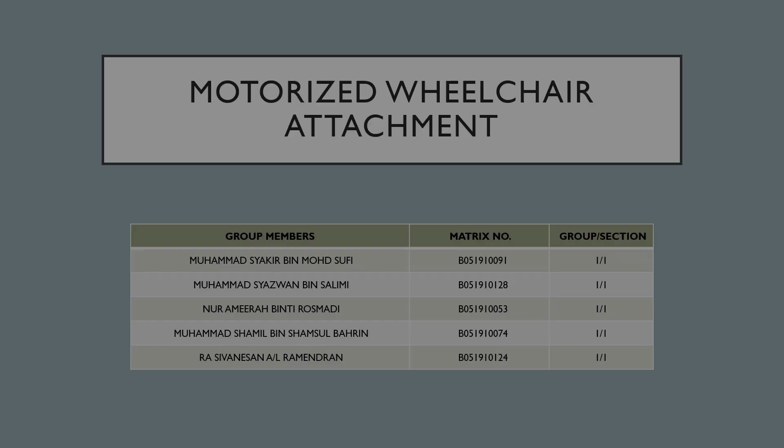Electric wheelchairs are extremely expensive to even be a viable option to most patients among the B40 and M40 community suffering a disability that renders them immobile. Some of them only have one arm after a traumatic accident and could not operate a wheelchair by themselves. As they cannot afford the necessary expense of an electric wheelchair, they just live with the disability and lose their independence. But for the ones that need an electric wheelchair, they will have to sell their current wheelchair to afford the motorized version. Our team saw an opportunity to help society by developing an attachment for a conventional hospital wheelchair that allows it to be motorized and controlled by a joystick, with disassembly in mind for ease of travel.

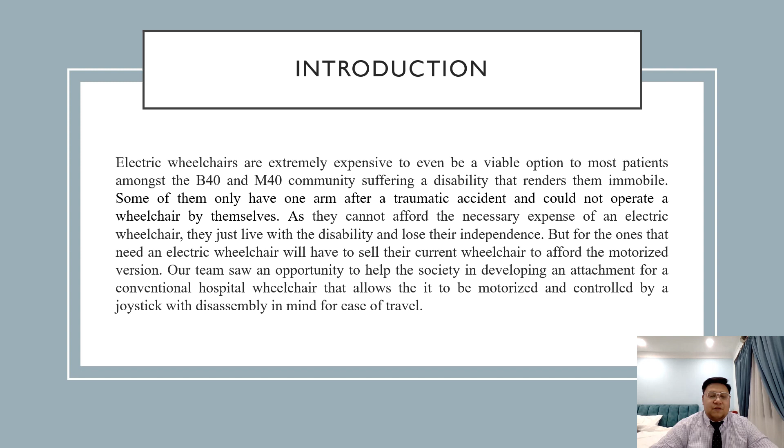The objective of our project is as follows: we will design an economic electric wheelchair package for the B40 and M40 community, as well as integrate safety elements for the safety of the user and its surroundings. It will be physically controllable by a joystick controller, and we will design it with ergonomic considerations. The design of the motorized wheelchair attachment will be tested and validated.

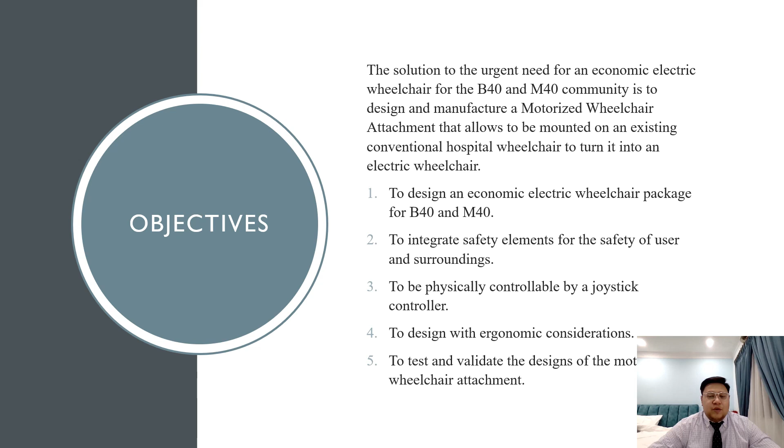Hi, I'm Sivanesan and I'll be doing the literature review. Omega Medic Supply is a company which produces electric wheelchairs. Their latest product is called the Omega Steel Electric Wheelchair, made out of steel. The limitation of this wheelchair is that it is not very portable because it is heavy and bulky, and the parts are not easily detachable.

Another company called Fresco also manufactures electric wheelchairs. Their latest product is called Fresco Electric Wheelchair Lightweight Hybrid Manual and Power in One. This wheelchair is made entirely out of magnesium alloy. The limitation of this wheelchair is that it only has a single way of operating it, meaning it can only be controlled by a joystick controller, and the parts are not easily detachable.

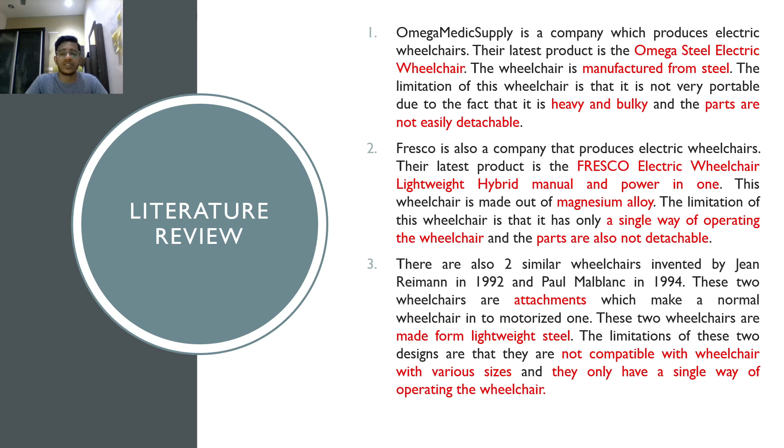There are also two similar wheelchairs invented in the US by Jean Reimann in 1992 and Paul Malblanc in 1994. These two are not actually wheelchairs, but attachments which you would attach to a normal wheelchair to convert it into an electric wheelchair. These two are made out of lightweight steel, meaning they will be lighter than an ordinary electric wheelchair. The limitations of these two designs are that they are not compatible with wheelchairs of various sizes - they can only be attached to a standard size wheelchair, and they also have only a single way of operating the wheelchair.

From this study, there are new elements and features that can be implemented into the current design so that it will stand out in the existing market. Features such as a height-adjustable controller and parts which can be attached or detached without the need of tools. Thank you.

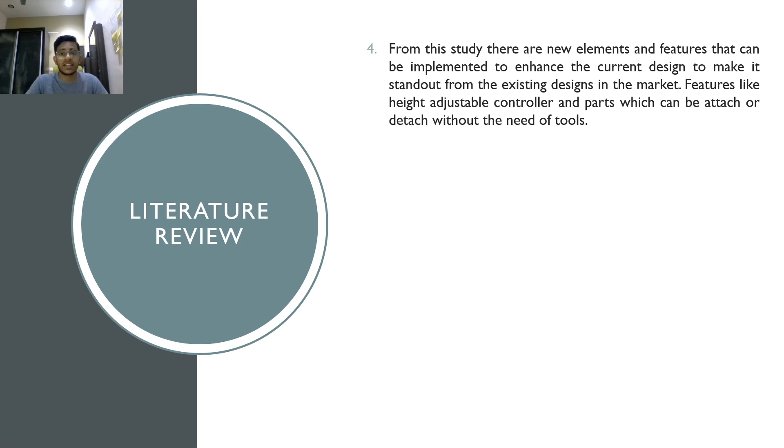I will explain the methodology used in generating the motorized wheelchair attachment. There are a total of 6 processes involved: survey, house of quality, concept generation, concept screening, sustainability assessment, and usability testing. I will explain the detail of each process further.

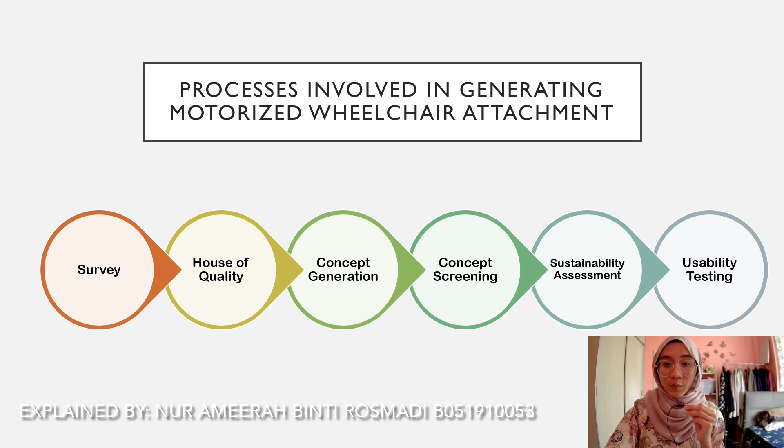In the survey, the targeted audience is people with household income below 4,000 ringgit. This consists of wheelchair users, carers, and the public. These are categorized as B40 and M40 in household income classification in Malaysia. The survey was carried out with a total of 41 respondents from both genders.

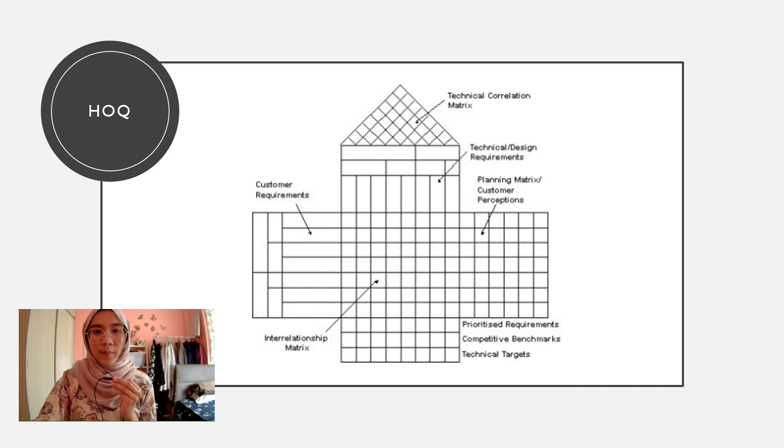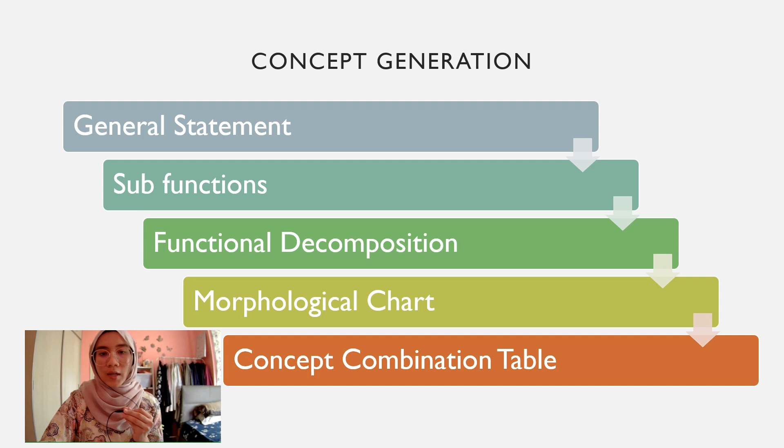The customer needs are translated and transferred into the customer requirement section in the HOQ template. From the HOQ, the team followed the concept generation steps. By the end of this section, various potential concepts can be generated from the concept combination table. In order to minimize our options from various potential designs, a concept screening is done using the Pugh concept selection matrix. By the end of this step, one design will be chosen as the final design to proceed with.

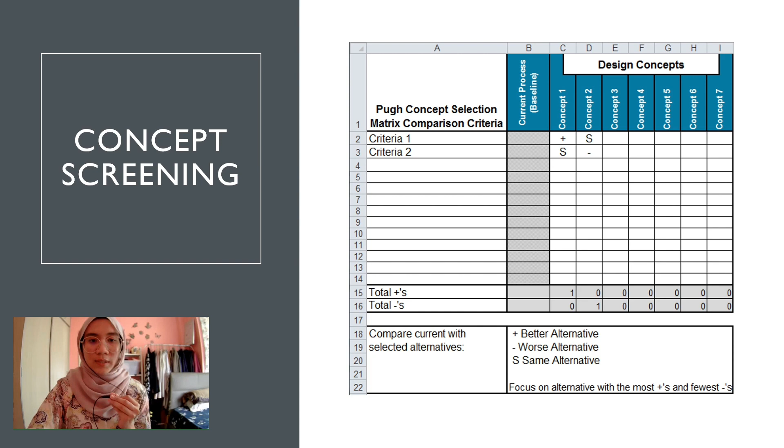The next step is sustainability assessment. In sustainability assessment, the life cycle, eco-web design, and eco-indicator analysis are done to ensure that the design and materials chosen will not harm the environment further.

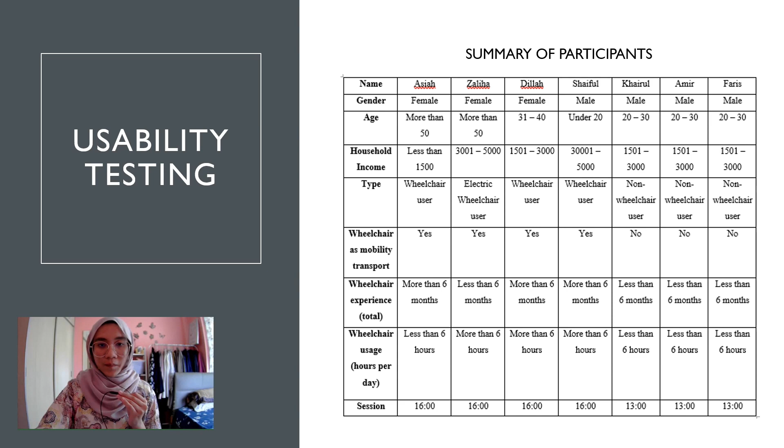The participants are recruited and screened by team members. The test was conducted using Cisco Webex. There are 2 sessions in total with 45 minutes per session. For the testing, 3 scenarios are given and 4 tasks included in the Google Forms. The questionnaire consists of 4 sections: screening, observation, questionnaire, and conclusion.

Hi, I'm Shazwan. We continue to the next chapter, which is results. First process is data collection.

A survey is conducted to get customer feedback for the next step. Next step is house of quality. This process consists of 3 elements: first is customer requirement, weight importance, and engineering specification. After the evaluation of house of quality, several engineering specifications are used for the next step.

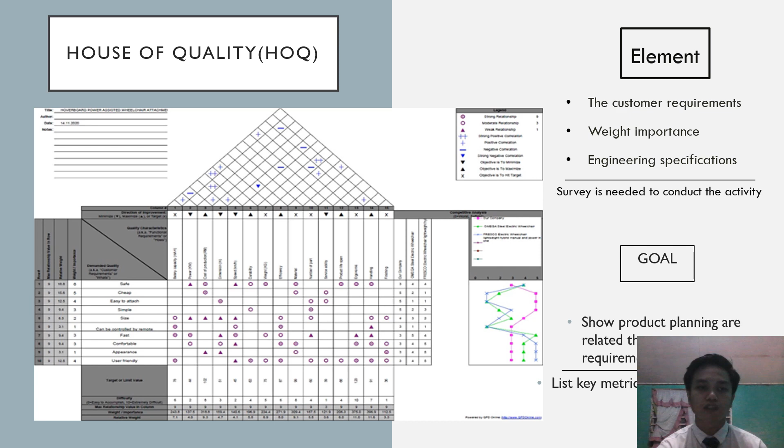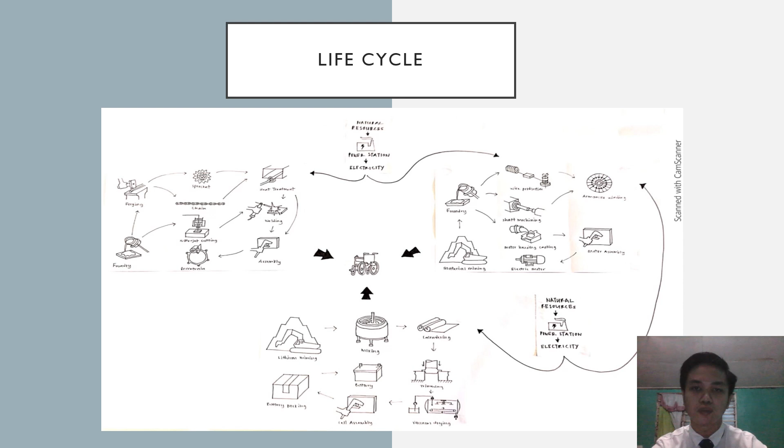Next is Eco Design Web, used to show environmental performance of the product. Low alloy steel shows the modest rating, meaning the material is suitable for our product and environment. Rating for brushless DC shows the parts are suitable, environmentally friendly, and highly recommended for the product.

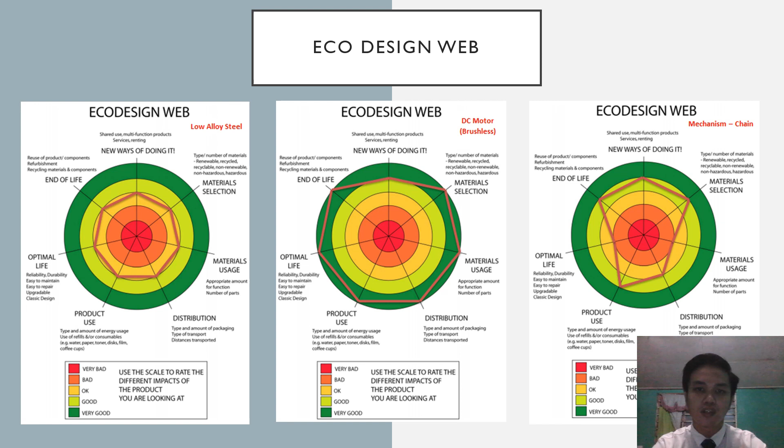Next is mechanism chain, showing the advantage and disadvantage of the product. Next is eco indicator, used to indicate the product in terms of material, process, and disposal.

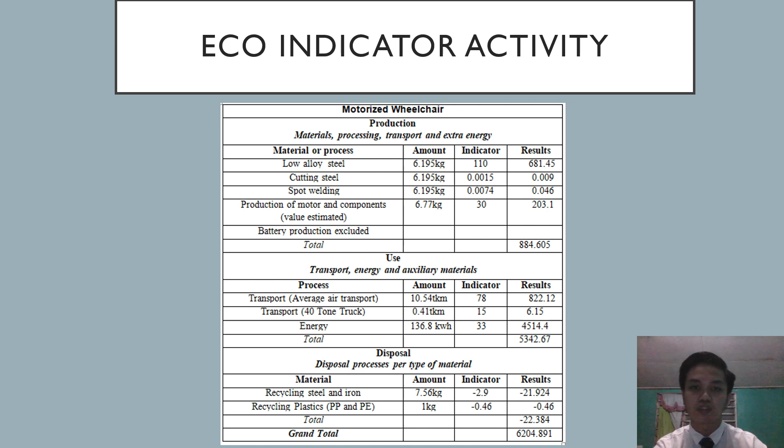The estimation is made based on the product going to market. The product is estimated to be manufactured in industry and the productivity is 200 units per month. The break-even for the product is 77 units.

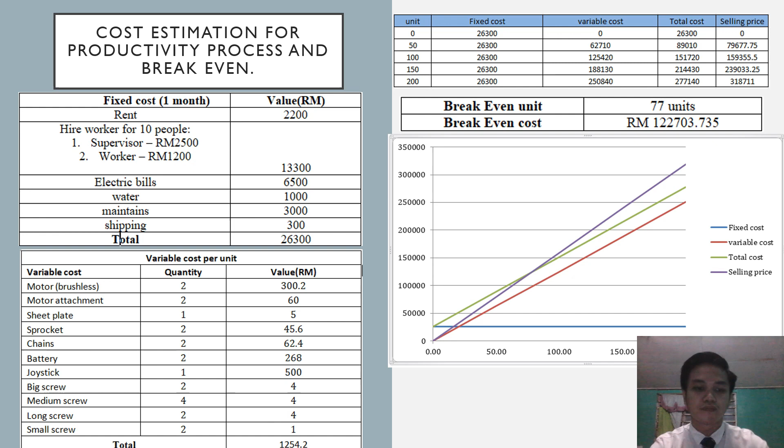Next is usability testing and implementation process. In this process, usability of the product is tested based on questionnaire and survey. Based on the result, some components need to be improved and redesigned.

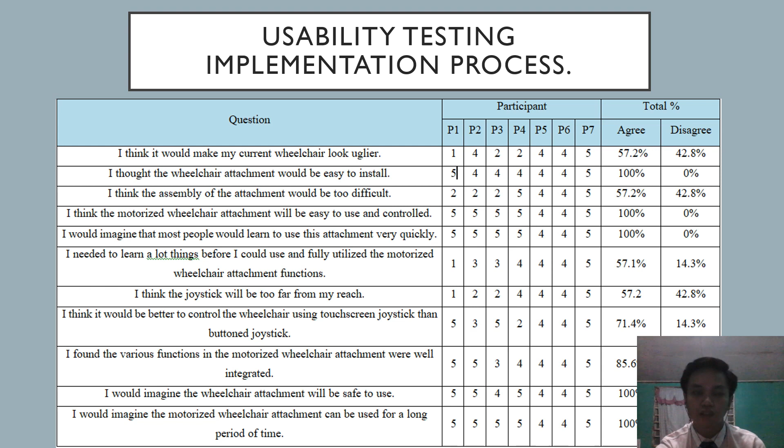Assalamualaikum and hi, I'm Syakir and I will explain the discussion. As you can see, all concepts and criteria are important to be embedded in the design and mechanism based on the search for information in patents, literature, and benchmarking.

The concept used is an attachment for a motorized wheelchair that can ease all wheelchair users and at the same time save costs. This way, wheelchair users can move easily without any help and lessen the work of people in charge of them. Based on the referred patents, literature and benchmarking, all wheelchair users realize that the motorized wheelchair attachment can help and improve their daily life.

For concept generation, we use the concept combination table. Generally, the design was sketched and listed based on the discussion from the house of quality and survey. The final idea of the end product was chosen from one of the sketches and has features combined from other sketches based on the functionality, requirement of users and cost.

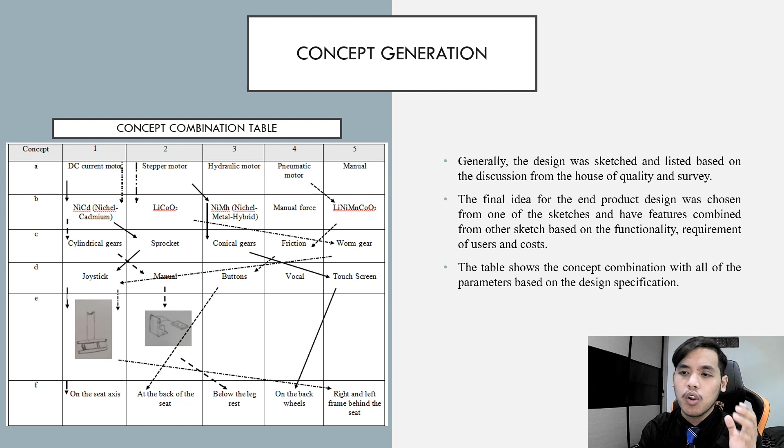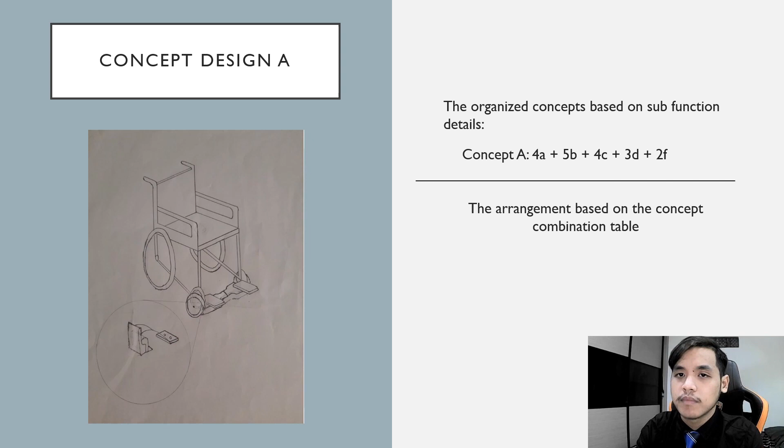The table shows the concept combination with all of the parameters used in the design specification. You can see concept design A based on the sub-function details. All of the arrangements are based on the concept combination table: concept design B, concept design C, D, and E.

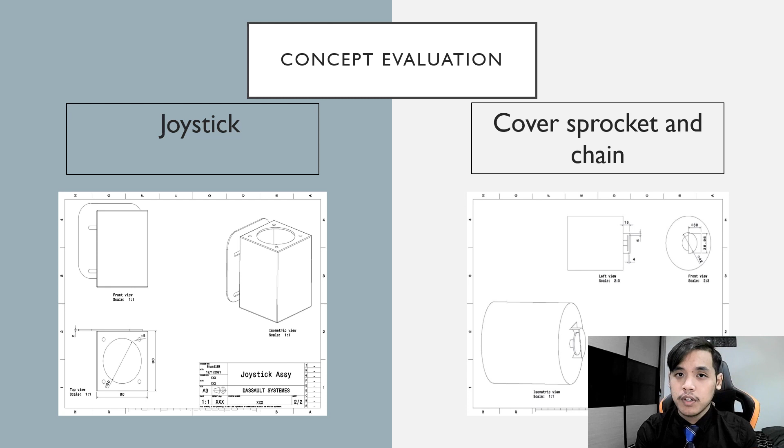Then we did concept screening and scoring. After the evaluation, concept D or design D was chosen as the best because of the high total value of rating and weighted score.

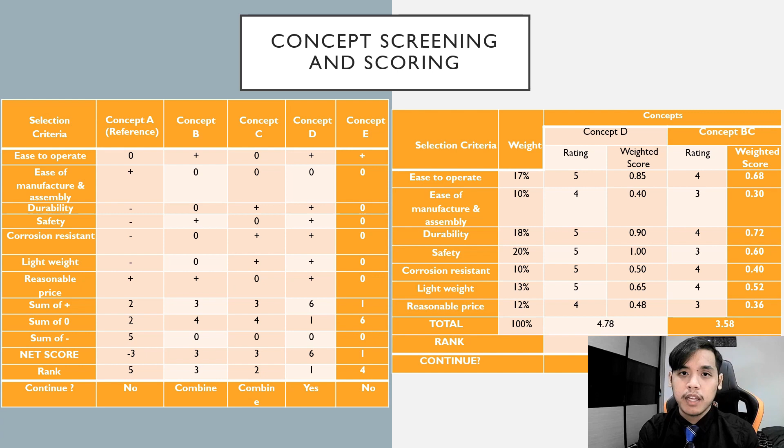From all of the concepts that have been done, this is the full 3D for our end product. As a conclusion, from all of the design concepts of the motorized wheelchair attachment, the best design was chosen. All of the product's complete design is given and the design results are obtained.

The important features such as safety precaution and maintenance problems were carefully studied and overcome for the ease of all users. The main objective for this project is to produce a motorized wheelchair that is affordable for all B40 and M40 class in Malaysia while maintaining safety and low cost.

The initial design of the product has been changed based on the result of the test to improve the product. The safety factor of the product has been improved to make the product completely safe to use. The improvement of the mechanism for the product has been made to reduce unwanted injury occurring.

In order to make the product stand out in the market, the product must be different from others. The innovative design that has been implemented and its ability to ease wheelchair users is a significant key. That's all for me, thank you.